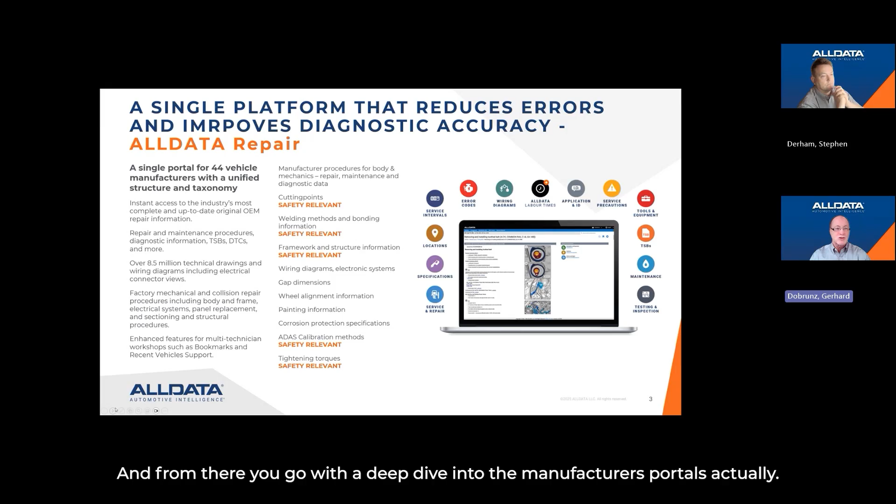We have not only the technical side covered here, which means we are talking about TSBs or DTCs, step-by-step procedures, how to repair a drivetrain—everything on the technical side of the car is covered.

But we also, in addition, cover the body repair side with a lot of safety relevant information. If you do body work on the car, whether it's cutting something off, or replacing the mirrors or the window screens, etc., you will be covered 100% around every single item of the car. This is a step-by-step procedure from the manufacturer.

We also have some add-on products to the core products. The first one would be labor times. So labor times is an add-on you can use if you want to see the OEM-based labor time—really coming from the manufacturer, what does the manufacturer say about how long it takes to repair this item or that item. You would add on ALLDATA labor times because it will save you time, since you know exactly how much time you have to plan. You can optimize your resources, and it will help you be more accurate on the repairs.

There's also another add-on which we call maintenance schedules, which you will find very interesting, because we have 61 brands here, 17 more than in the core product. You also can switch to your local languages—Norwegian, Swedish, Finnish, Danish, whatever you want to choose from the Scandinavian languages and more. You can change the language right in the product, which might be very interesting if you want to do a service or maintenance on a car. You can work in your commonly known local language.

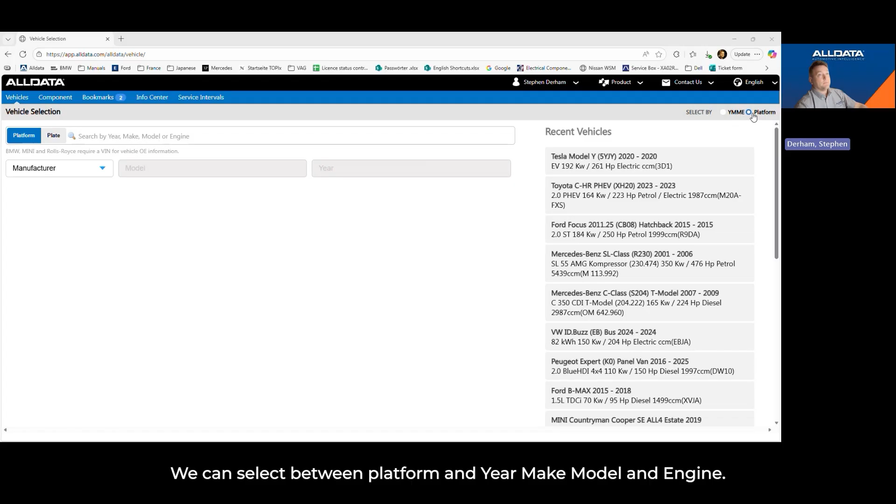Every time you log in the morning, you're going to be presented with this screen. This is where you navigate to any vehicle you want to source information on. It's very simple to use. We can start on the top right hand corner, where you can select between platform and year, make, model and engine.

If we start with platform, we simply click on the manufacturer's drop down list. As Gerhard just pointed out, these are the 44 brands in our core product that we cover. All you need to do is select, for instance, Audi, then within the model select which model you're working on, and then select the model year and the engine type that you have.

Simply click on the engine and you'll be taken forward to the next screen where you can select any information you want to work on for the vehicle. This screen, irrespective of any manufacturer or model you click on, will always look the same.

It's when we select some information that you need for a vehicle that this is where the information will look slightly different. Because you have to remember with ALLDATA, all the information we publish is not rewritten, it's not redrawn, it's all information direct from the manufacturer.

So as we're clicking on Audi at the moment, all the information you'll see is direct from Audi itself. Some of you may have a Volkswagen Audi Group background - the information you'd see there, you'd recognize from when you'd been in the workshop.

Now, if you didn't want to select by platform, on the top right-hand side we simply click on YMME. Then if you know the year of the vehicle you're working on, we would simply select 2021, for instance, Audi, and then select the vehicle you're working on and select the relevant information related to that vehicle in the workshop.

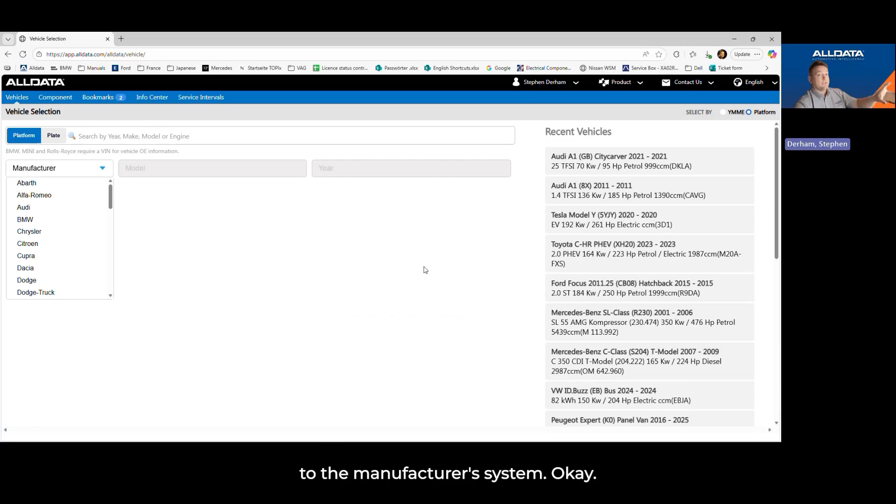One of the only differences we have here is for brands BMW, Mini and Rolls-Royce. All the information you see in the product outside of BMW and Mini is held within our servers themselves, whereas with BMW and Mini information, that goes through to a pass-through, going to BMW's ISTA and AIR system. So we're essentially passing you through directly to the manufacturer's system, but we'll cover that a bit more later on.

So what we do initially is select a vehicle, and what I'd like to select is a Tesla. I know within the Nordic regions EV is certainly king at the moment, and from what I can see, Toyota, Tesla and Volkswagen Group certainly seem to be the market leaders of vehicles currently on the road.

If we take this Tesla as an example, you can see now originally we selected Audi, but we're now back on the Tesla. This page still looks the same, but again, it's the information beyond that we're going to see.

Each of the sections you have here on the top left - we have popular information, and hopefully that will speak for itself. That's the most popular information that people want to access in the product for the vehicle itself.

Systems and components here is going to cover all the information that's available for the vehicle under these subheadings. And then information here will be combined with the information across the two subsections to the left, which I hope makes sense.

Now, the simplest way to access any information - on the top right hand side of the screen we have a search bar. Anything you type in here will look for the information under the systems and components chapters and the popular information.

So it's looking for everything that's within that workshop manual. For something nice and simple, if I just type in brake pad, you may have a Tesla in the workshop that you need to change some pads on. We've typed in brake pads, and what it does is break down the information from service and repair.

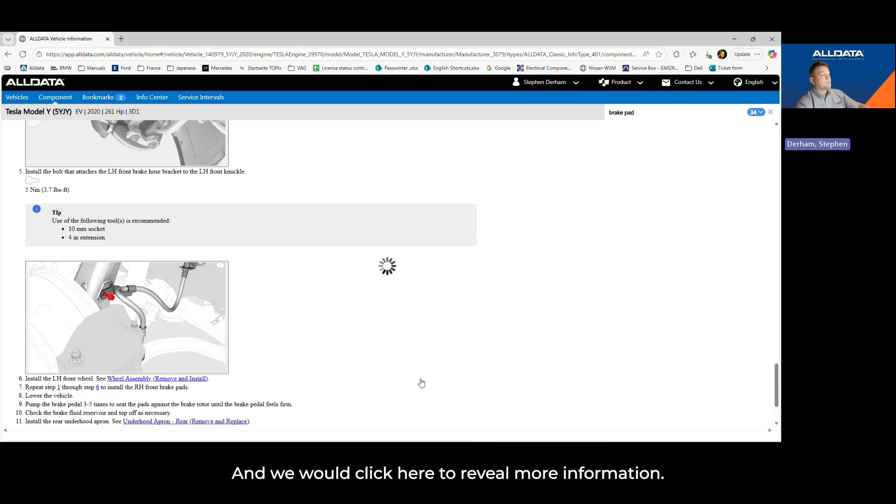So of course, to change the brake pads, we need to take the wheels off, and that's going to give you the information for wheel removal, and of course the all-important wheel nut or bolt torques for when the wheel is going to go back on.

Okay, so another example of some information as well. If a customer's come in for some brake pads, you may notice once you've taken the wheel and tyres off that they've got some abnormal wear. You may need to carry out some wheel alignment.

So wheel alignment here as well, we can simply type that in the box. And what it's going to do is give you all the information again that's relevant to the job you want to take on.

So not only is it going to give you values, there's lots of providers out there that will give you lots of information, lots of specs, lots of torques, lots of fluid capacities, but it's knowing what to do with that information, which of course is key.

So with ALLDATA, you're going to get all the information that you need, all the specs, all the tightening torques, all the fluid capacities, but we're also going to tell you exactly what you need to do with the information that you have. So wheel alignment, exactly what to do, where to adjust, camber, caster, everything's going to be there, and of course all the important values for you as well.

Now, some of you guys, I believe, may touch upon body repair. Again, not only does ALLDATA cover mechanical repair and chassis information, it will also cover complete body repair information as well. So again, something quite simple, if we type in front bumper, that's going to look for anything to do with the bumper itself.

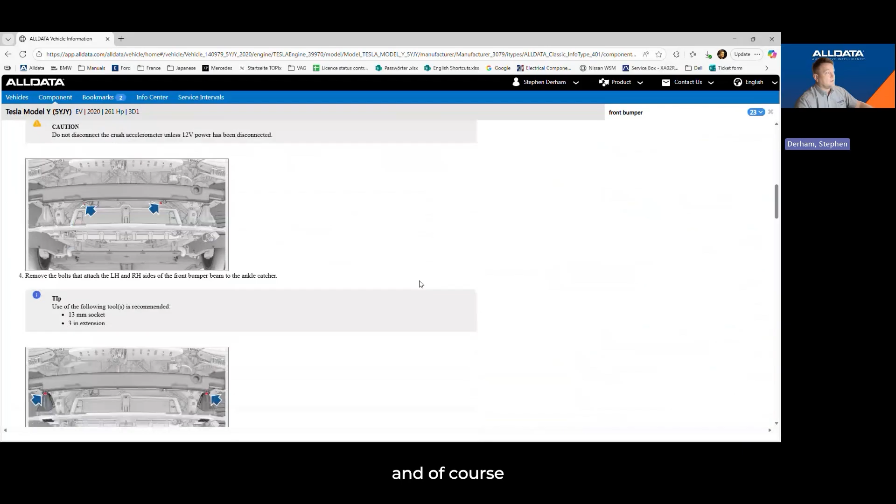And what we would do is again click on any relevant information to the job in hand, and it's going to tell you exactly how to do that job. Nice and clear, good details, everything that needs to be done, how to take the vehicle apart, and of course how to put it back together again.

Being an ex-tech myself, of course, it's very easy sometimes to take something off, but it's getting it back together that's the difficult bit. So with instructions like this, that's going to take any of the guesswork out of how anything needs to go back together.

When you've selected the information you need for the job you're doing, if you want to have a look at anything else, you would simply click vehicle here. And what that's going to do is take you back to the menu that you originally saw after selecting the vehicle. So now again, you can carry on selecting from here if you wanted to do any additional jobs with the vehicle, or you can of course select from the sub menu here.

Now, as Gerhard briefly touched upon, we're looking at the core product. One of the additional items you can have is labour times, which is here. Labour times, of course, is a great tool, certainly for front of house or your receptionist, or even the techs just wanting to know how in-depth a job may be, because a large labour time can indicate something that's going to be quite complex, which is not a problem because you're going to have the instructions to carry out that job.

But of course as well, front of house, as I briefly touched upon, if the customer had come in with the front brakes on his Tesla that they wanted to do, within the section here you have all the manufacturer's repair times that you can use in conjunction with your labour rate, and then you're accurately able to quote your customer.

So there's no guesswork exactly like that. You can, in your workshop, allocate the time you have for the day, time to the technician, and again, all importantly, give an accurate and honest quote back to your customer as well.

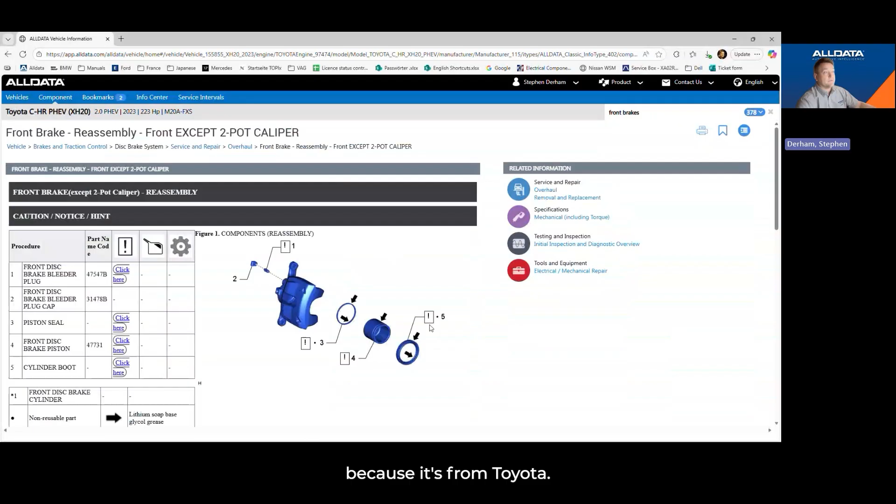But the difference you're going to see now is the information, of course, doesn't look anything like Tesla because it's from Toyota. You're going to have all the information again in great detail, telling you exactly what to do, all parts, all components, how to complete that job. And that's for any information on any vehicle, for anything that the manufacturer publishes.

Now we're going to select vehicle back here, so we can go back to the menu if you want to select something else.

So we take a quick look at the quarter panel. For anybody that's going to do bodywork, we touched upon bumper just now, fascia covers. That's going to cover your simpler work, such as vehicle trims, door mirrors, any sill trims, items like that, bumper fascias.

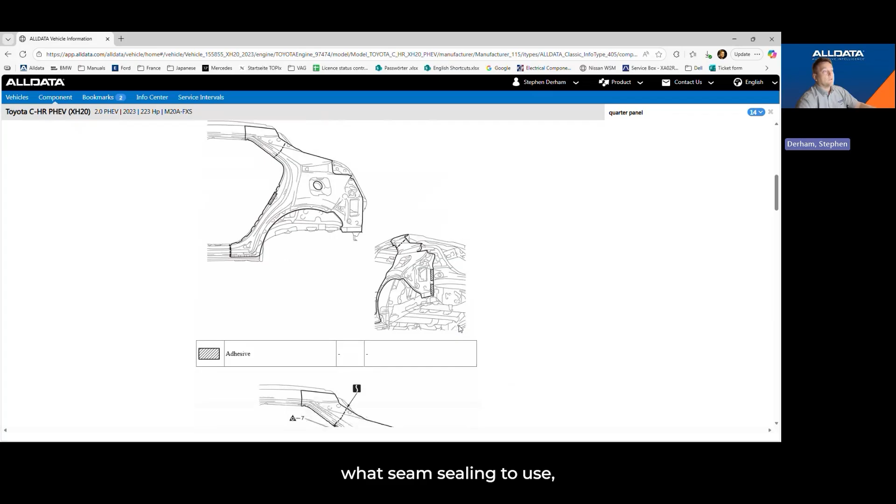But of course as well, if you are a body shop that gets involved more in depth with bodywork information, it's going to give you complete structural information, how to cut a quarter panel off, where to weld it back on, what seam sealant to use, all the important information, what welding methods to use, and of course, all importantly, where to weld.

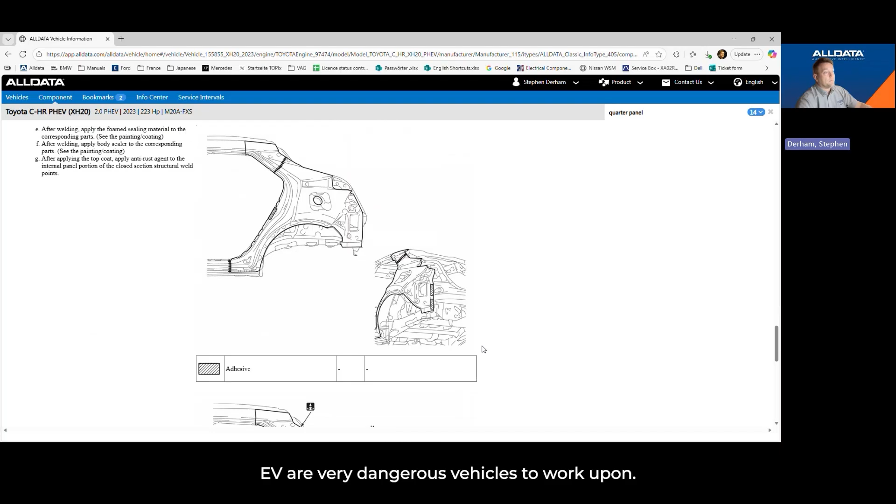Any safety precautions as well. Of course, EVs are very dangerous vehicles to work upon. Any high voltage shutdown procedures are going to be included in here, and of course how to power the vehicle back up again afterwards.

So we've changed the quarter panel, and there's some wiring damage as well. The vehicle's been in an impact. So we're going to click on vehicle. ALLDATA offers comprehensive coverage of all manufacturers' wiring information.

So I'm not sure what system you guys may have seen before. You may have seen wiring information that's been rewritten, redrawn, which is fine, easy to follow, but it doesn't have information such as connector views, ground locations, splice joints, and lots of other information, loom routings as well. All important information if a vehicle's been damaged, or if you're trying to trace a fault on a vehicle.

All we would simply do is click on diagrams, and within the next section that comes up, we would select electrical OE, and similar to the sections you've seen, you're going to have all wiring systems broken down under different sections of the vehicle. Hopefully if you take a quick look at these, they should talk for themselves, and you would click on the section you want. So computers and control systems, as an example, this is where the engine control management wiring is going to be.

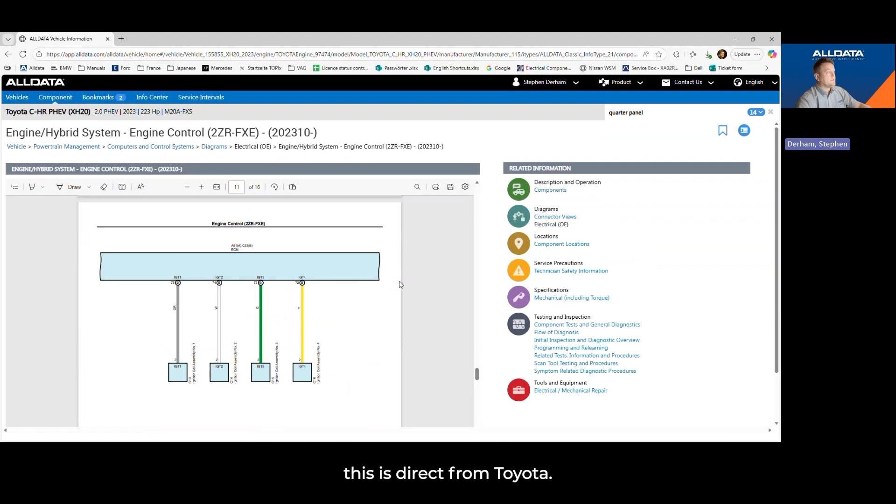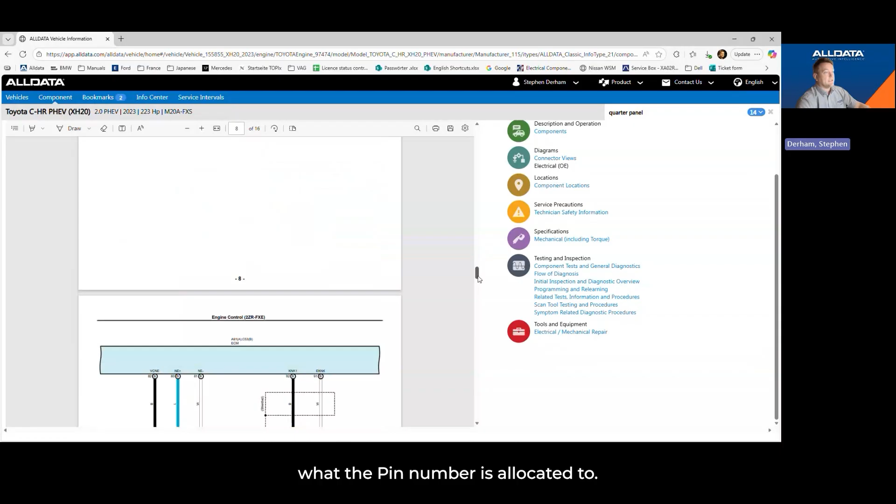And the information that you're seeing here now, again, this is direct from Toyota, fully interactive, fully in color. Going back to what I said with some recent wiring diagrams you may have used, you'll have the all important wire color and pin number, but a lot of the time with the pin numbers you do not have connector information to know what the pin number is allocated to.

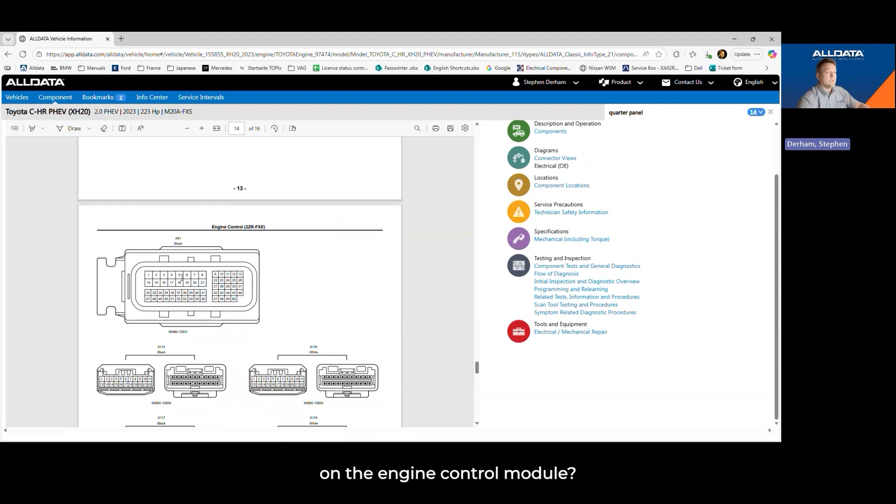So within our wiring diagrams, you will see you'll have the all important connector views relevant to any system. So now we're taking the guesswork out of where is pin number 5 on the engine control module. You can use the wiring diagram with any of the connector information, and this is going to make your life, speaking from experience, so much easier to complete that job more efficiently.

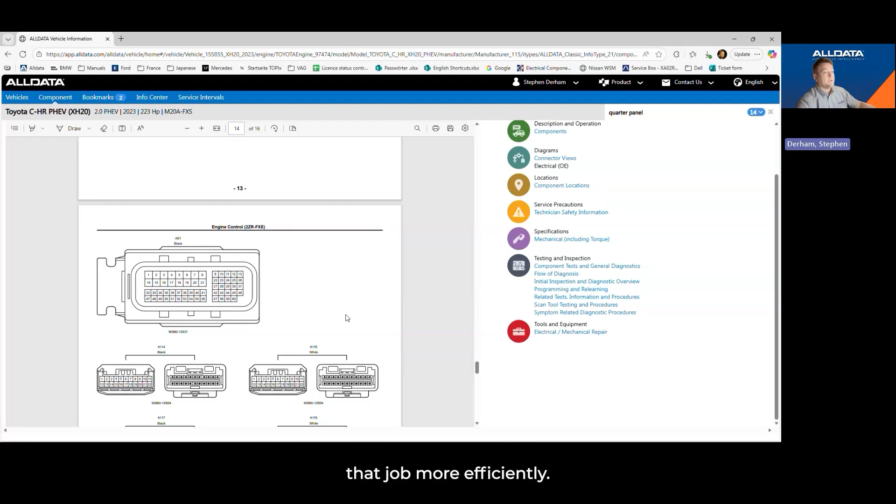So the wiring's all been repaired, and we need to have a look at something else on the vehicle as well. We're just going to click back on vehicle here.

And another subsection that Gerhard touched upon is the maintenance schedules that we offer. Simply all you would do is, after you've selected your vehicle from the initial homepage, we're going to click maintenance schedules. Fully integrated into our product, you will now be presented with this page here.

As you can see, this is the vehicle we've selected, and going back to the maintenance schedules up here, you would flick between tabs across the top left hand or right hand side of your screen, wherever you have that set up. We're now going to click on the vehicle.

So the information that's available here would be service information that you can access rapidly. So if you want to create a service schedule, it's going to be through here, and we'll do this as an example. Now, of course, the all important information with service schedules depends on the region where you are.

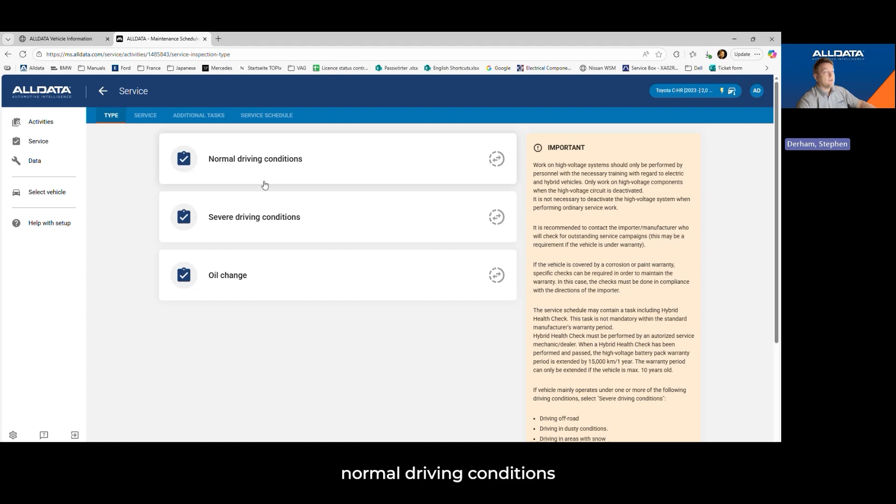We're going to have normal driving conditions, but potentially for the Nordic regions where you are, we have the all important severe driving conditions. So we're going to select a severe driving conditions schedule, and then you're going to have the option between selecting mileage and years. For the purpose of this, the vehicle's done 30,000 kilometers and it's 2 years old. We would simply click here.

Would you like to change the oil? Yes, we will. So we'll select any additional options that are generated.

And we need to bear in mind as well, all these schedules that you see are fully manufacturer driven, keeping you and the work you're doing completely within warranty with the manufacturers, which is of course a very important thing to bear in mind. So we're going to check the active carbon canister as well.

Select next. And what we're going to be presented with is a nice, clear, easy to use service schedule. And these are going to be uniform for any manufacturer in any model that you see.

So we can print this service schedule off. You can attach it to your job card, so the tech's got something nice and easy to work through, a nice tick list to go through. You can save this to your systems as well, so you can have it for a record against your customer's vehicle. So you're going to know what service schedule's been done and what's due next.

You can also advise the customer when their next service is due. We can add bits for tyre depth, tyre pressures, and also you can type notes in here that will be saved in your system.

And of course, some customers do like a copy of this as well. So you can print a copy and the customer can have that along with their invoice. As we briefly touched upon earlier, front of house reception, if a customer's coming in wanting to know what the service is due, how long it's going to take and how much it's going to cost.

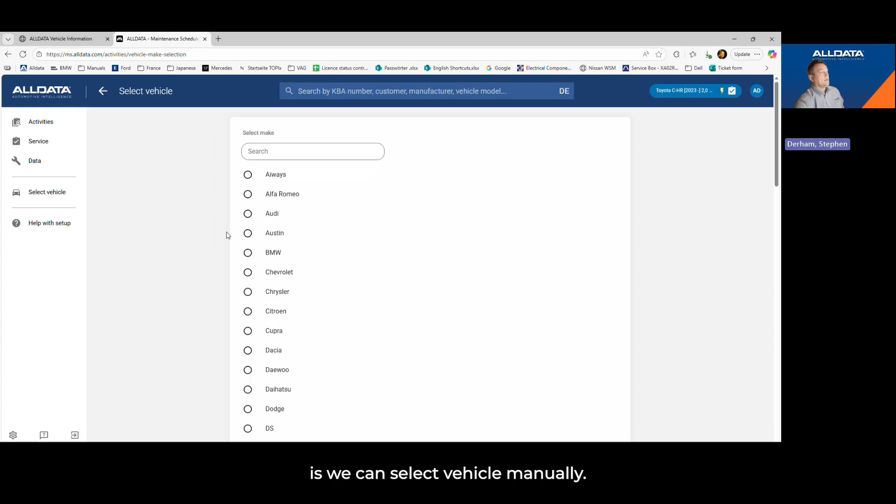Okay, what else we can do is we can select vehicle manually. So you may have noticed, we'll cover this again shortly, that the models here, there are a few that we don't have in the core product, which is perfect. You may have some different vehicles come in.

So there's some older items in here. Saab may be of interest for you as well. There's lots of Saab information, service, maintenance, all items like this. You can search in here with your VIN number and registration number as well. Unfortunately, I can't demonstrate that because where I'm based, that's not going to work in my region, but you would simply just type in registration or VIN number, and it's going to take you back to your vehicle.

So if we do select a vehicle, let's have a look at a Mazda. We will select a Mazda CX-60, just showing you how to do this manually. We will select the vehicle, and we're now back at the page you saw earlier on. So for clarity, create service.

We only have options for fixed service intervals on this vehicle. The vehicle's done 60,000 kilometers, it's 3 years old. We don't want any additional items, so we're just going to click next and next again. What you will see is exactly the same style schedule as you saw with the Toyota, but of course for a Mazda itself, just keeping everything nice and clear for you as well.

So the techs working on the vehicle need to know some data to carry the service out. We simply click on data and go to general information. Within general information, we have points for jacking, lifting points, and it's going to show you the all important items of where to lift the vehicle.

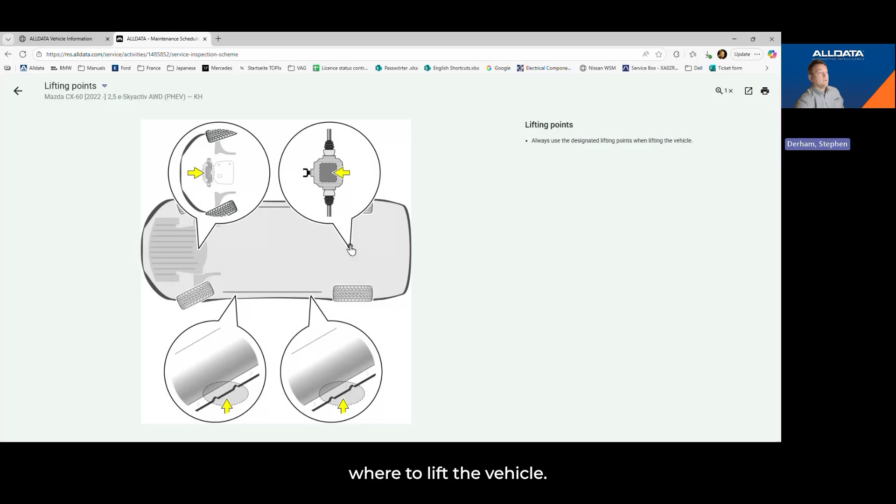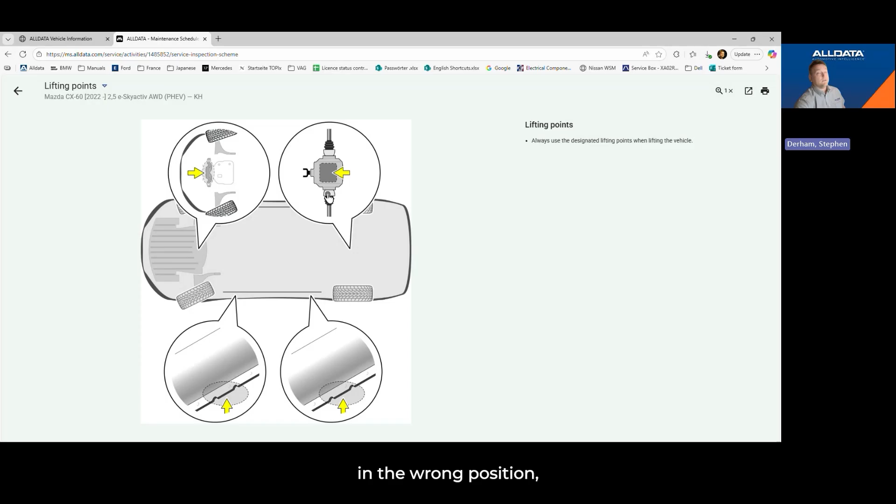Of course, I'm sure you're well aware, with modern EV vehicles, certainly with the likes of BMW, a lot of high voltage cables can be run through small plastic tubing under the chassis. So if you lift the vehicle in the wrong position, that's going to be very detrimental. Quick information like this at your fingertips is vital.

OBD connector port if you wanted quick access for scanning anything on the vehicle. Switching on the ignition, of course, very important for mild hybrids and EVs as well, if anything needs to be powered up, such as changing the rear brakes if you've got electronic parking calipers on the back.

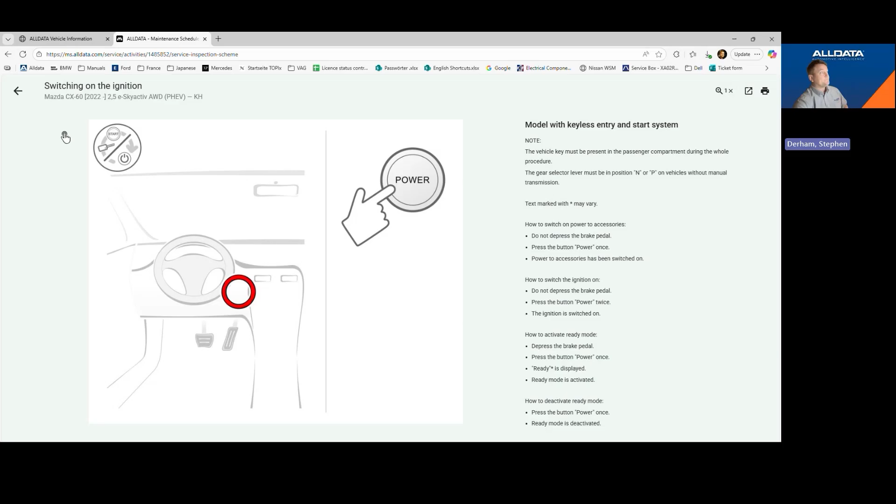Okay, we have a look under service and maintenance information, the service reset that we mentioned. A nice thing as well to have, certainly for front of house, if a customer comes in and wants to know what's due on a service, we have this for every vehicle as well. Very clear, very easy to see what components are due at what time.

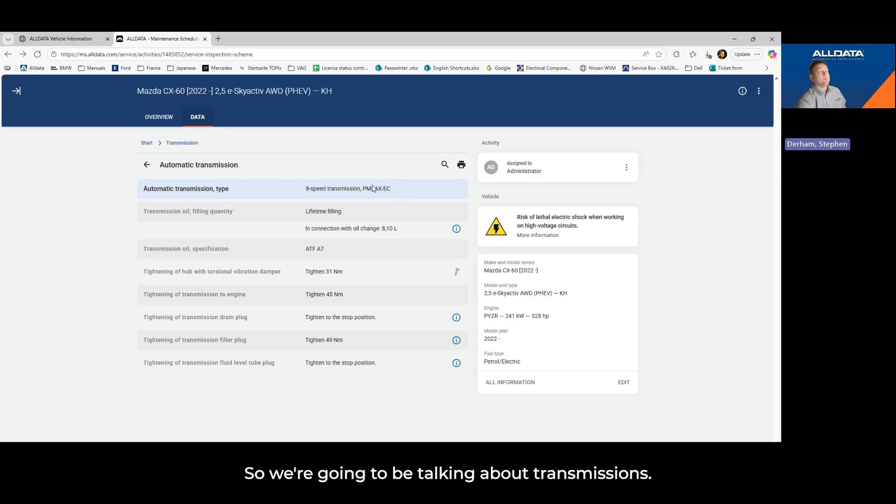Just take a little look around here for you as well. Lots of other information as well. So we're going to be talking about transmissions, engines, information that you want to know quickly, lubrication specs, lubrication capacities, everything's going to be in here for you. It's also going to tell you how to do that. Very quick points for drain plugs, fill plugs, level plugs, everything like that, at the touch of your fingertips.

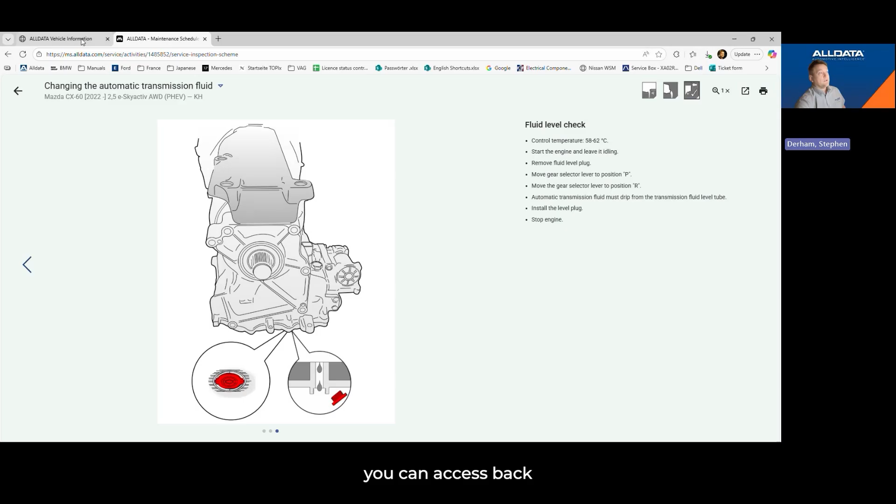Of course, if you did want to know anything more different, you still have our tab open. You can access back to the original manufacturer's information that will touch on anything more in depth if that's required as you're servicing the vehicle. But for quick access, service and maintenance is certainly going to be the key here for you.

If we just go back to the main product quickly now for you, as you see here, just flicking between tabs, we're going to select vehicles again. Now under manufacturer, as I said, for platform here, we search via plate on the top right hand side, YMME or platform.

For BMW, Mini, we do need that VIN number, or Rolls Royce if you're lucky enough to have any of those come into your workshop, or unlucky, whichever way you're going to look at that. We put the VIN number in, and as I say, I can't use the VIN search unfortunately for the region where I am currently, but you will be presented with this next page if we just wait for that to load through. As you can see, similar to the Audi, the Tesla and the Toyota that we've already looked upon.

But we are going to now need to just manually select in here whatever information you might need. Still very straightforward, still nice and simple, technical repair instructions. Hopefully these subsections should speak for themselves. So we're going to select repair instruction for you.

And then once we've selected what you want, we have here again the information in its subsections. So you can click on any section that you would like to carry out work on. Simply select the job that you would like to do. And then the next page that we're going to be presented with is information directly from BMW, because now we're passing through to BMW's ISTA and Air platform. If we just let this load.

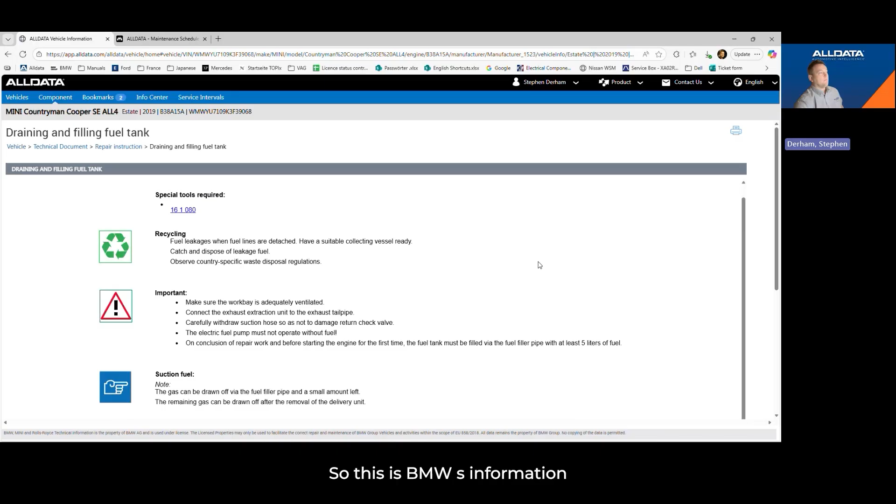And there we are. So this is BMW's information in its original format. Everything completely clear, easy to understand, everything that needs to be done. We have blue hyperlinks here, which is uniform to any other manufacturer as well. We will click on these to follow any further information.

If you wanted to carry out another job, we would simply click vehicle, and then we're taken back to the menu you saw before. Exactly the same as before - if you wanted to carry out maintenance information, we would click maintenance schedules, and you're taken across here. All the information on the system - if you wanted a wiring diagram for the vehicle, or technical information - everything is fully printable.

There's a couple of items across the top here I'd like to briefly touch upon. There's a bookmarking system that we cover. If you're in a section of a vehicle, you have the option to click bookmark and it will save that page for you. You can save up to 20 pages. If another technician is working on the same system as you in the workshop, to save you having to completely reselect manufacturer and model each time, you would select a bookmark and it takes you back to what you last looked at. Your colleague can save a bookmark and you can simply flick between jobs nice and quickly, nice and easily as well.

Here you can see Info Center. Now, Info Center is something unique that ALLDATA can offer you. I work within the Info Center team myself, and what we can do is provide information and assist you with anything on the product. So if we flick through the product, let me find an example for you as a Kia. You may see here that the text for this section is bold, whereas this text for this section is not - it's slightly italic and grayed out. If you see information like that, it's telling you that currently the information is not published within the product, which is not a problem. With other providers, if that's the case, there is no information and they wouldn't be able to help you any further. We can.

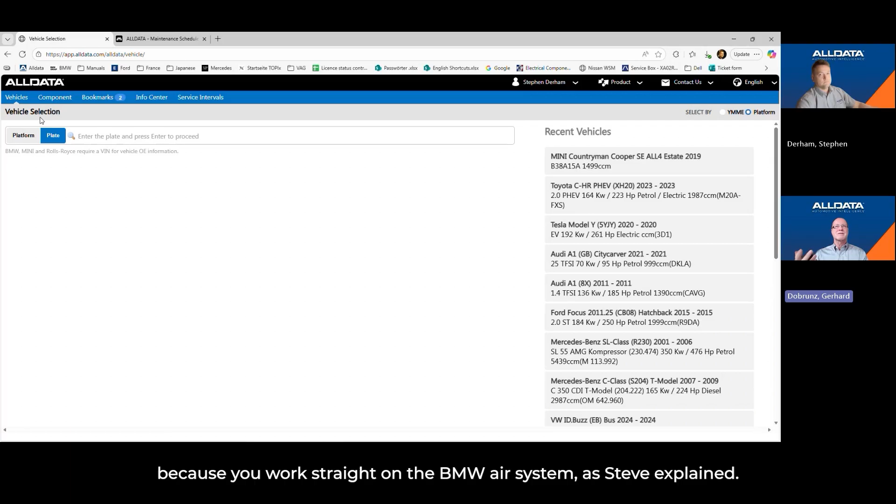This has been a requirement from BMW for roughly 2 years, and that includes Mini and Rolls-Royce as well. That's the reason the search tree and the way of getting into a BMW is a little different, because you work straight on the BMW system, as Steve explained. Everybody who knows the BMW system or has had manufacturer portal access will recognize the tree and taxonomy.

On the positive side, you're working live in the BMW environment, meaning every new BMW - so if you have fleet customers, every BMW published on the road will be immediately in the portal, because you'd have a VIN number for that car. There's no time delay, unlike asking how long it takes to be published in ALLDATA. You get instant access to any BMW, Rolls-Royce or Mini, so there's a little advantage for you if you're working with those brands.

Let's just see if we've had any questions in.

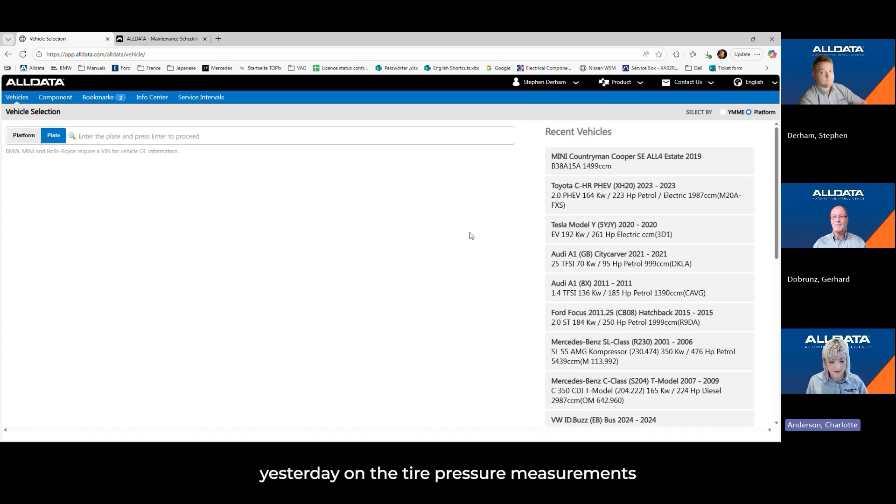There's a question, Steve, that came up yesterday on tire pressure measurements and how we show that in the product. Yeah, no problem. So if you guys are working on anything to do with TPMS, the information is going to be within the product itself. If I can just show you something, bear with me. It's going to show you if it's a passive system or an active system, and of course if you're changing tyres - something quite simple, but knowing how to reset a tyre pressure monitor can be quite difficult sometimes.

So we can have a look through the system, just bear with me for a second. Let's have a quick look and see what we can see here. Anything related - you can type in the top right hand side here that you've already seen, and relevant information comes up for that vehicle related to the TPMS system. It looks different and is presented differently for any manufacturer, but it will tell you exactly what needs to be done. If any diagnostic tools are needed, it's shown here, and essentially it tells you exactly what needs to be done to get rid of that warning light on the dashboard for your customer afterwards. So yes, Charlotte, TPMS related information is embedded within the product.

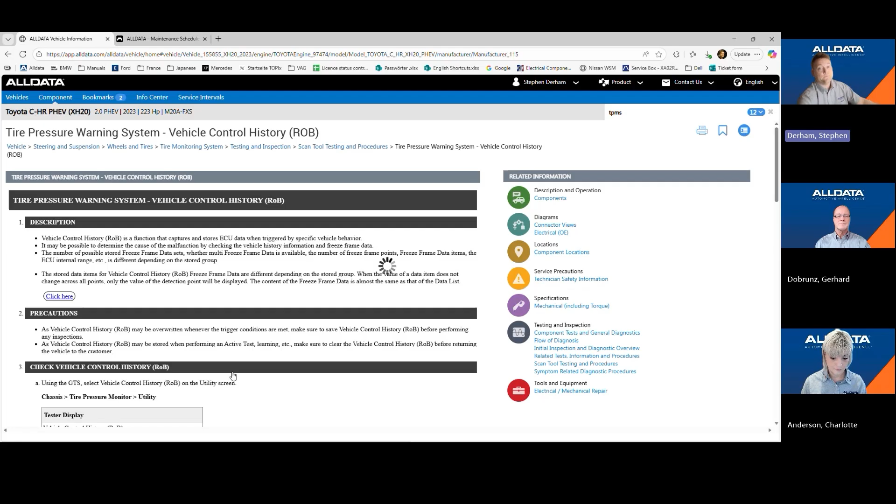Perfect. Another question that arose yesterday was when you were going through the Tesla about ADAS calibration, taking off the front panels and things. Yeah, no problem, bear with me - let's go back to that Tesla then. Tesla's information, like all manufacturers' information, looks different, but Tesla's does look nice from an aesthetically pleasing point of view, shall we say. Let me just go back to that front bumper.

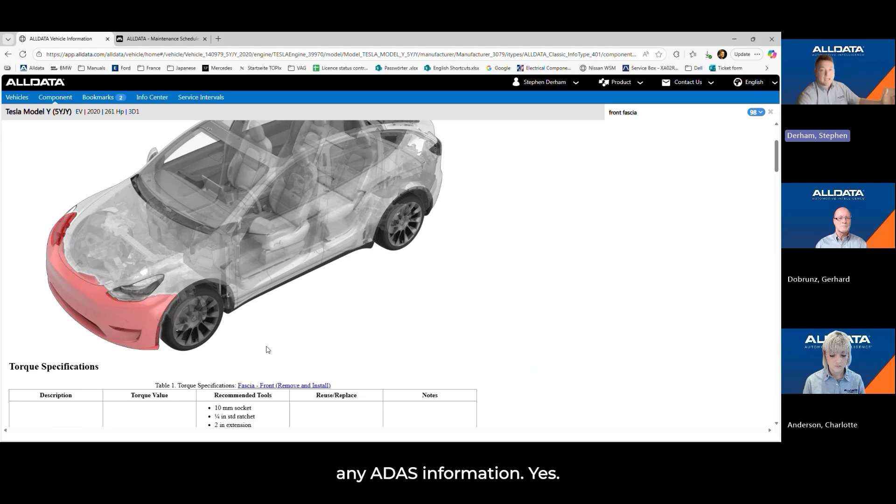As I'm sure you're aware now, anything you hit on the road - even a large pothole - can disrupt anything ADAS related. So as an example, if we go back to this: any components you disturb, it's going to tell you if there's anything ADAS related within the system, and if you need to carry out any work on it. For the sake of this demonstration, say you needed to take the front bumper off - it's going to show you, after taking the bumper off and putting it back on, anything related to it, giving you information for the calibration work needed. Diagnostics are sometimes needed, along with setups, but any ADAS information is completely included within the product. Hopefully that answers your question.

Yeah, perfect. And then a question that's just come in about whether technical service bulletins are available. Yes, technical service bulletins are available. They're not available for all brands, simply due to how our license agreements work and how some manufacturers publish them. If you have anything related to a technical service bulletin, I would strongly suggest using the info center section here.

Some TSBs can be very vehicle specific, and I'd always like to check that for you from a safety point of view. So you would simply open up an info center request, ask me for the TSB, and I will go direct to the manufacturer for you. If anything's available, we send it straight to you. There are TSBs in the system, yes, but from a safety point of view, I always like to check it directly with the manufacturer, and that's something we can do from this end.

Just quickly, while we're talking about this, an info center request will take a maximum of 4 hours to turn around from you submitting. In reality, it's a lot less than that, but it was just to let you guys know.

Perfect, and then final question on trouble codes for DTCs. Yeah, okay, so trouble codes DTCs are fully covered in the system. Let's have a quick look at this Toyota as an example. So recent activity, straight back into the vehicle, systems and components, all trouble codes, DTCs, and then you can select between manufacturer codes, body codes, chassis codes, powertrain codes, whichever code you need. You can either click from the menu here, or type the code in on the search box on the right hand side that you've seen before. Manufacturers will work differently with how they present information.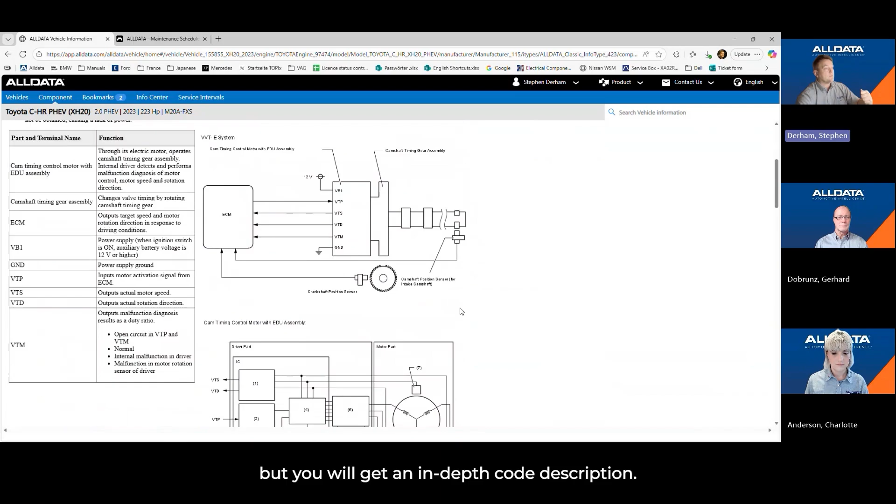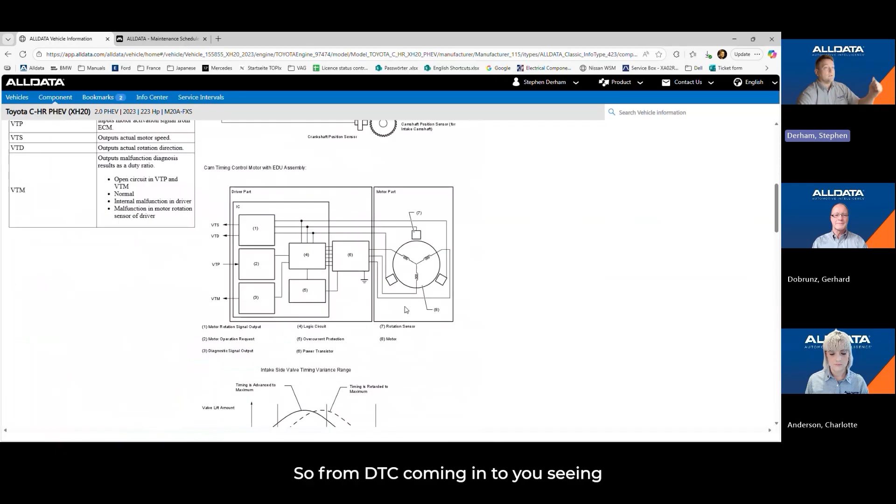If we take, for instance, a common P code for any manufacturer, Toyota is going to present the information slightly different to the likes of Ford, but you will get an in-depth code description, why the code's coming up, and what you need to do to hopefully rectify that issue. With the trouble code and the information we're seeing here, the blue hyperlinks are going to take you to any mechanical work that you may need to do. So a variable valve timing pulley may need to be checked, taken off, and we're going to take you to the information within the product. With a DTC, you can use this hand in hand with the wiring diagrams I showed you earlier on. So from the DTC coming in, to you seeing what the problem is, to diagnosing the fault, to fixing it, all in one place, nice and simple.

Perfect, thank you very much. You're very welcome. Are there any other questions? Gerhard, is there anything you would like to add before we close? You're on mute, Gerhard.

Sorry for that. I think from my side it was important to see it is a big product. It is covering a lot of OE brands with millions of documents. But we wanted to show you today, don't be afraid to use ALLDATA. It's easy to use. Use the search box, use our info center, which is our technical support. As Steve explained, it will help you if you can't find something, if you're not sure. We can help you out, and this is not at extra cost or anything. It's just a service from our side to make sure you're doing the right repairs on the right vehicle. So that would be it from my side.

Back to Charlotte. I have just seen a question come up. Someone asking if we cover more exotic brands, Maserati, Ferrari, Lamborghini. Maserati, yes, we cover Maserati directly on the product and through myself at Info Center. Ferrari, Lamborghini, currently no, we do not have a licensing agreement with those brands, so that's something we cannot offer at the moment for you.